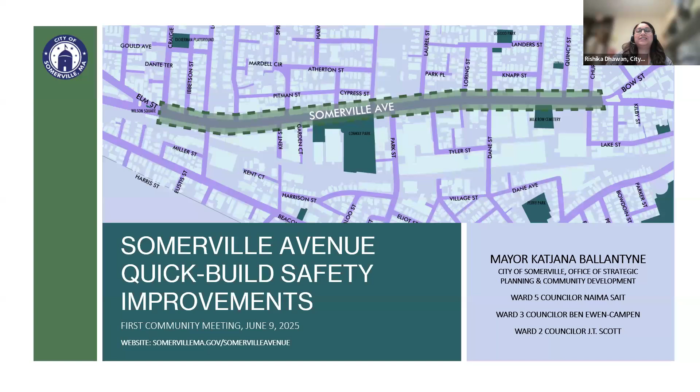Yeah, Viola, sorry, do you want to change the slide? Rishika, are you going to go through the virtual meeting instructions? Yes, sorry, could you change the slide? Oh, of course, yes, that was on me. My apologies. You're fine.

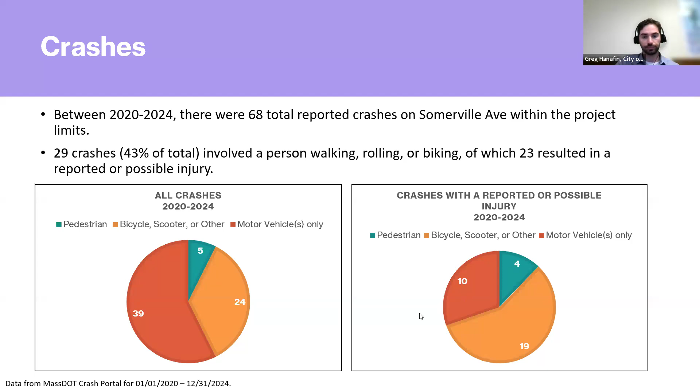Vehicle speeds and volumes are among the indicators of the likelihood of crashes and the chances of a serious injury occurring when a crash does occur. The posted speed limit on Somerville Ave in our project area is 20 miles per hour between Bow Street and Conway Park, which is designated as a safety zone, and 25 miles per hour west of Conway Park. Speed data collected at 2 locations in 2021 and 2022 found that between 31 to 39% of motor vehicles were traveling faster than those posted speed limits.

Vehicle counts collected at the same time found an average of almost 12,000 motor vehicles traveling on this part of Somerville Ave per day on average, which ranks among the highest volume streets in Somerville. We're also going to be collecting additional vehicle speed and volume data at 3 locations along Somerville Ave this spring to bolster this previously collected data.

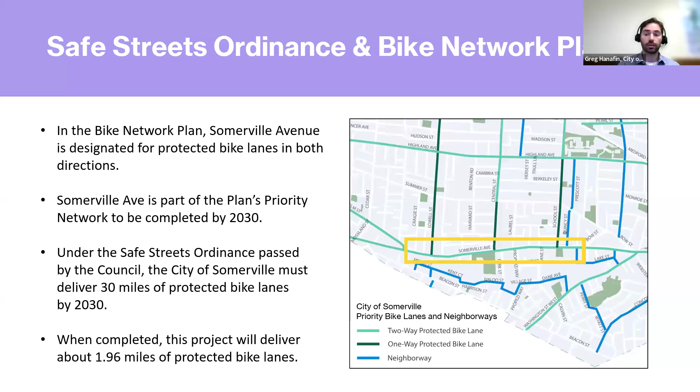Why do we install protected bike lanes as a way to improve safety? Protected bike lanes are a dedicated space for people on bikes that are physically separated from motor vehicles by some kind of barrier. For quick build projects, this protection often includes a striped buffer with a vertical object like a flex post. Parked cars can also sometimes serve as a barrier between people biking and motor vehicle traffic.

Protected bike lanes are an important safety treatment on high volume streets because they increase comfort and access for people of all ages and abilities, reduce crash and injury risk, eliminate the threat of dooring from parked vehicles, reduce potential conflicts between vehicles and people biking, and they're often paired with narrower vehicle travel lanes or visually narrower streets, which encourages slower traffic speeds.

Somerville Ave is centrally located and a convenient route for traveling to nearby commercial districts in Union Square, Porter Square, Davis Square, Harvard Square, and Inman Square. The Kennedy and Argenziano schools are located just outside of the project area, meaning it is the most direct route for many families and children traveling to school by different modes, including walking, biking, and transit. There are 2 bus routes that serve Somerville Ave, which we'll discuss in more detail later in this presentation.

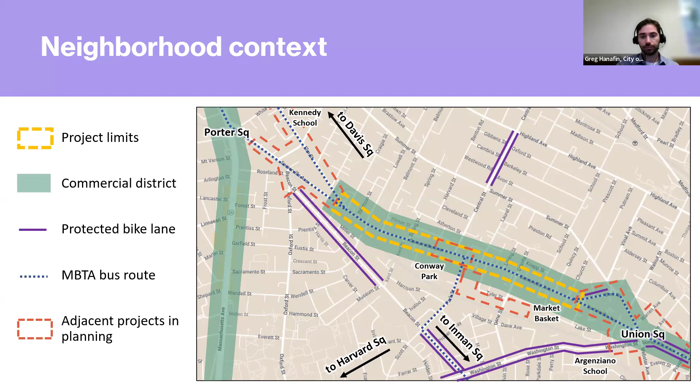A small portion of Somerville Ave near Central Street and Park Street will be reconstructed as part of a different project before our quick build project begins. This project will include floating bus stops, a raised crossing, sidewalk curb extensions, and other traffic calming measures. Design has been completed and construction is expected to begin later this year. The Somerville Ave quick build project we're discussing today will connect with both ends of this project.

The Elm Beacon Connector project is another quick build project that includes Elm Street and Somerville Ave just west of our project limits. This project includes similar elements as ours, such as protected bike lanes and other potential treatments we'll discuss later. The design for that project is currently in progress, which presents a great opportunity for the two projects to coordinate and ensure consistency. Implementation of the Elm Beacon Connector project is expected to begin in 2026.

The Union Square Plaza and Streetscape project will redesign and improve access to the open space in Union Square, including safety improvements to the streets around it. The project will reach the eastern edge of our Somerville Ave quick build project. It's currently in design and planning, presenting another opportunity to coordinate between the two projects. As of now, there is not a construction timeline for this project.

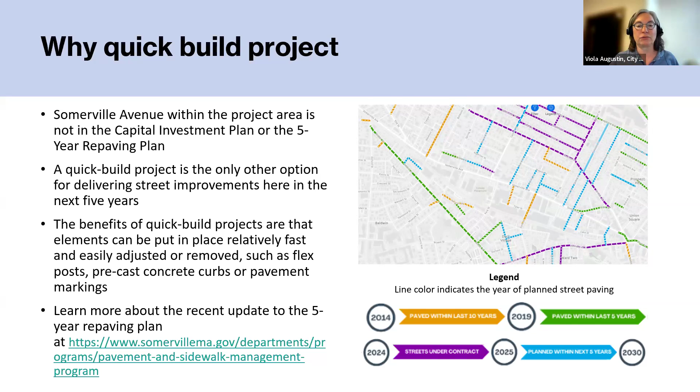If you'd like to understand the process of selecting streets for the 5-year plan and find out which streets are included, you can follow the link on the slide. So an alternative way for us to deliver protected bicycle lanes is through quick build projects. These use pavement marking, signage, and movable elements such as flexible bollards. They allow us to implement the project much faster, though not design it faster than standard construction. It also allows us to be more flexible down the line if additional changes need to be made or if we realize something isn't working—a great way to test something before full construction.

To be clear on what can, cannot, or will not be in this project: it focuses on safety improvements achievable without reconstruction. What will definitely be included is installing protected bicycle lanes using flex posts and removable curbs, pavement striping, and signage. Some parking will be removed, and travel or drive lanes will get slightly narrower. We will make crosswalks safer by designing for improved sightlines. For this category of definitely-included items, we are looking for your input on how to design these changes most effectively.

The next category—what could or might be included—covers changes to parking regulations, bus stop changes, and traffic signal changes. Here we are looking for your feedback on if and where these changes are needed. Finally, it's important to note what is not included: full repaving of the road or repouring of all the sidewalk will not be part of this project. We will also not add speed humps, raised crosswalks, or new crosswalks, and no utility, lighting, or stormwater work will be done as part of this project.

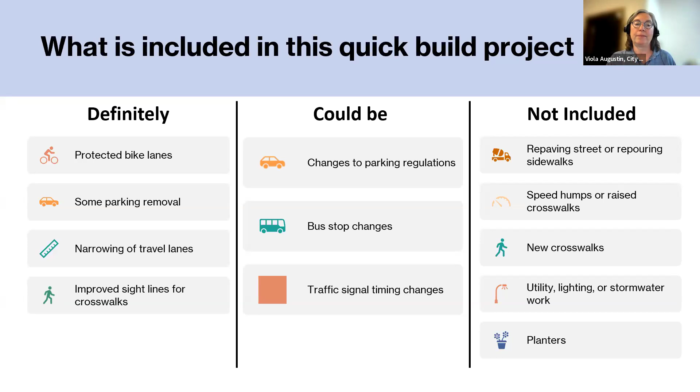And we will also not add sidewalk elements such as planters or benches. This does not mean you cannot let us know where any of these changes are needed, and we will record your comments, but we will not be able to incorporate them in this category for this quick build project.

The timeline for this project: we are at the very beginning, with this being the first public meeting. We have not started design beyond some test fitting of elements. After this meeting, we will use the summer to collect feedback from both the public and city departments, and incorporate that information gathered in summer 2025 for initial design development this fall and winter.

Then when the weather is good enough to be out on the street again in spring 2026, we will present the initial design and again ask for your feedback. In summer and beginning of fall 2026, we will finalize the design. At the end of 2026, we will share the final design and secure a contractor so that implementation can happen in 2027.

And at this point, I think Rishika will do another poll.

Before we jump into the next section explaining more about the existing conditions and potential improvements, we want to ask how you use Somerville Ave, specifically between Elm Street and Bow Street. I'm going to start the poll, give it a few seconds to answer.

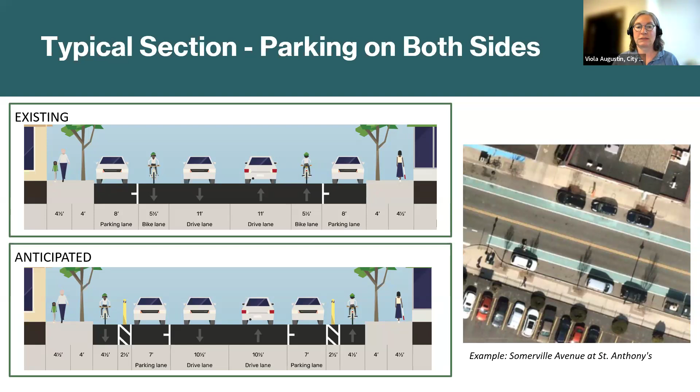And these dimensions are a continuation from the Elm Street, Elm and Beacon Connector, Somerville Avenue cross-section.

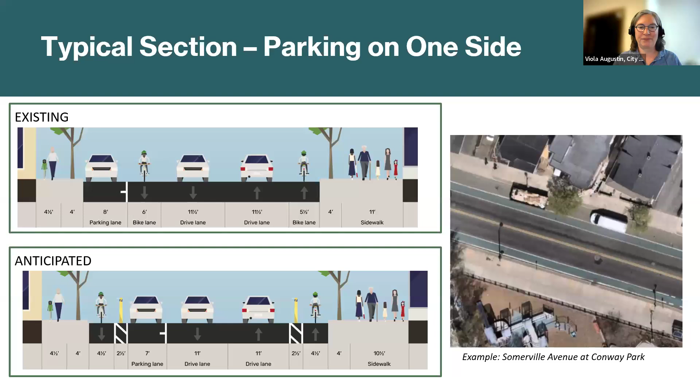In this scenario, there are some sections of Somerville Ave that have no parking on either side without a crosswalk, and we would basically add flex posts to the buffers in those sections.

You can see we can arrange the 7 foot bike lane with buffer next to the 7 foot parking. We have 10.5 foot lanes, and then again the same thing on the other side, 7 feet parking and 7-foot bike lane with buffer.

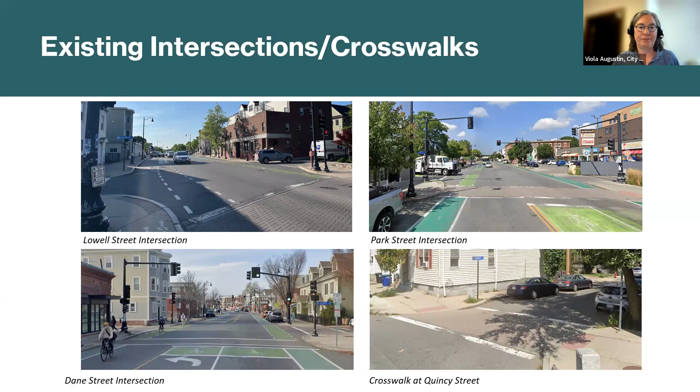So what can we do in a quick build project to improve intersections? We can make signal changes, mostly timing changes, so we can add more green time if needed. We can also change the sequence of phasing and what mode goes in every phase—that's generally an easy fix. We might be able to make some equipment upgrades, but no major upgrades are anticipated right now, so there's some limitation to what we can do with signal changes.

We can also evaluate if all the existing signals along the project area are necessary. In particular, we looked at the signals right at Loring Street and at Beach Street, and again we're looking for your feedback. Do you feel like these pedestrian signals are necessary?

The other improvements we've talked about already are the clear corners. These images very clearly show that if cars are parked too close to a crosswalk, especially kids that are not that tall cannot be seen. By making sure that parking cannot go that close, we can hugely improve the safety of a crosswalk. We have data from Hoboken, New Jersey, where they've rolled out these clear corners citywide, and they had no reported traffic fatalities in over 6 years. So we feel this is a very low-hanging fruit to hugely improve safety.

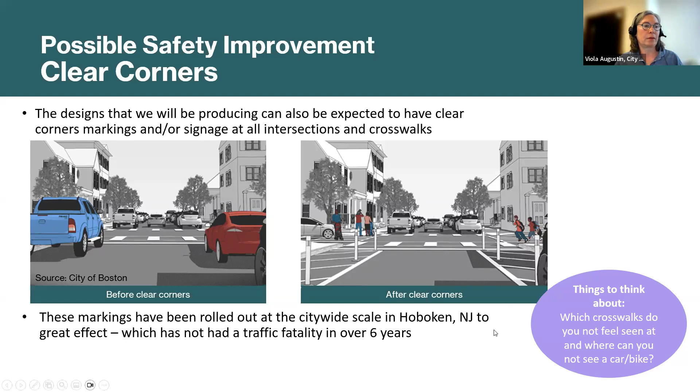The last fairly easy safety improvement is what we call centerline hardening. We deploy flex posts in the center, and that deters people from turning into side streets too fast—they have to really go around this flex post. It also indicates the presence of a crosswalk, so it's another visual cue for a driver to slow down.

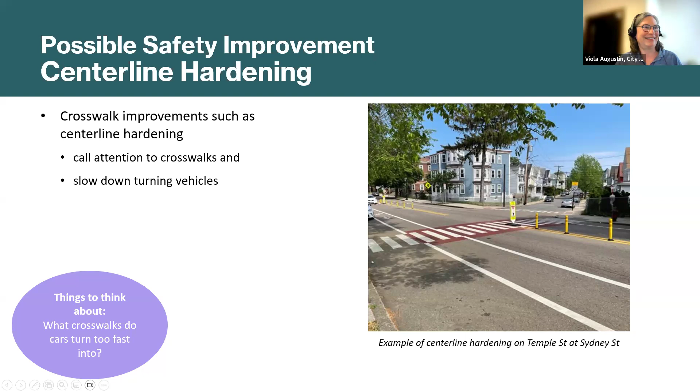This one is specifically following more of what Viola mentioned and talked about at the intersections. We want to know more about where you feel most unsafe on Somerville Avenue.

Okay, at the moment we're getting most votes for Park Street and Central Street, with a few for Elm Street and Craigie Street, about 13%. Give it a few more seconds. Okay, looks like most people, about 59% of responses, are Park Street and Central Street. And end the poll, thank you.

All right, next I'll talk about bus service within our project limits. Bus service operates all along the segment of Somerville Ave within our project limit. This slide shows images of two existing bus stops, one by St. Anthony's Church and one by Market Basket. Currently, all the bus stops in the project generally look similar to these, with the bus pulling out of the travel lane across the bike lane to reach the stop.

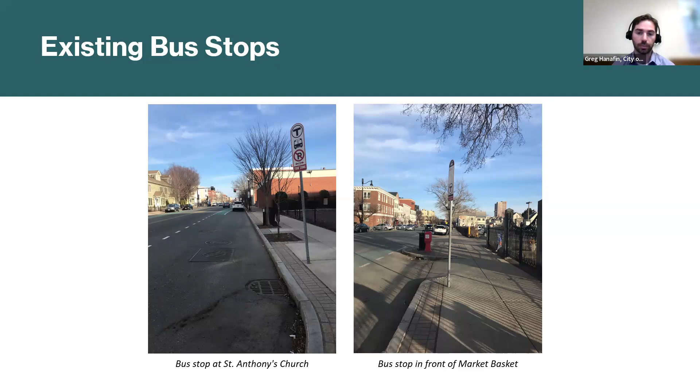Later this year, as part of a different project, construction will begin on two floating bus stops near Central Street and Conway Park.

The map on this slide shows the existing bus routes that serve the project area and the locations of all the existing bus stops. The Route 83 services the project area west of Park Street, and the Route 87 services the entire project area. As part of the MBTA's bus network redesign effort, a future high-frequency bus route, the Route 96, will also serve the entire project area. However, a date has not yet been set for this route to launch.

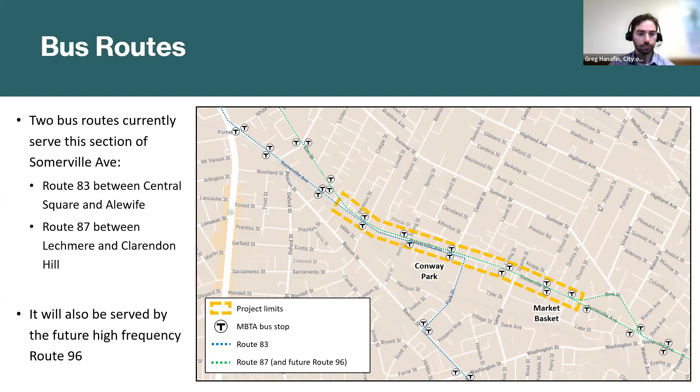One of the bus service improvements we can consider as part of this project is bus stop consolidation. Stop consolidation looks at where the number of bus stops along a street can be reduced to find the best balance between convenient access and bus operations, which can help reduce bus delays for riders by reducing the number of times the bus stops.

The MBTA's recommended bus stop spacing is between 1,000 and about 1,300 feet. All of the existing stops within the project limits are closer than that recommended spacing currently, and the map on this slide highlights one extreme instance where two stops are about 400 feet apart. However, the recommended stop spacing isn't a hard and fast rule, and proximity to key destinations is an important piece of locating bus stops. For example, we know that Conway Park and Market Basket are both destinations where we need to maintain bus stops, even if they end up being closer than that recommended minimum spacing.

So we're very interested in hearing from community members about where you'd like to see bus stops, as part of our evaluation of possible consolidation opportunities. This map also highlights the Elm Beacon Connector project, which is conducting a similar evaluation of bus stop locations, and we'll make sure the two projects are coordinated on any bus stop changes being considered.

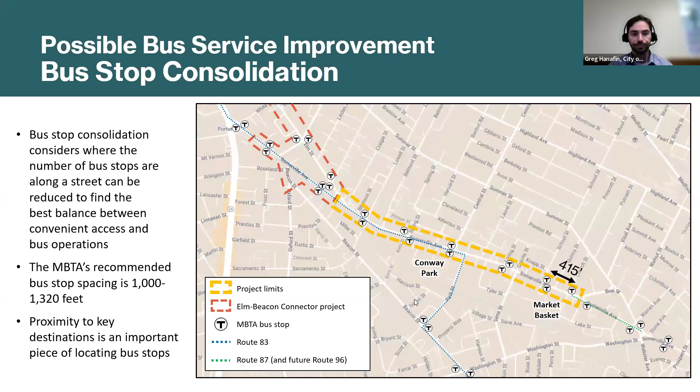Apart from consolidation, as part of this project we can explore where it may be possible to relocate bus stops to create a safer and more comfortable experience for riders. This particularly applies to bus stop accessibility. We know there are cases along Somerville Ave where buses currently don't have enough space to pull parallel to the curb, meaning the bus can't properly deploy its wheelchair ramp, and riders may need to step into the street to get onto the bus.

For example, the bus stop in front of Market Basket heading toward Union Square is currently about 53 feet long, but would need to be a minimum of 100 feet long to meet the MBTA's definition of an accessible stop. We can't widen the existing stop because of the bump outs on both sides, but we can consider if there's an alternative location for this stop near Market Basket that improves rider safety and accessibility.

Generally, for a curbside bus stop like these, the city prefers to have bus stops after intersections and crosswalks, which we call a far side stop, and there are a few reasons for this preference. One, it tends to be safer, since buses don't block crosswalk visibility of oncoming traffic while they're in the stop. Two, it helps reduce delay because buses don't get blocked in by vehicles stopped at traffic signals. And three, it allows shorter bus stops, since the bus has more space in front of the stop to pull into it, whether that's an intersection or a driveway.

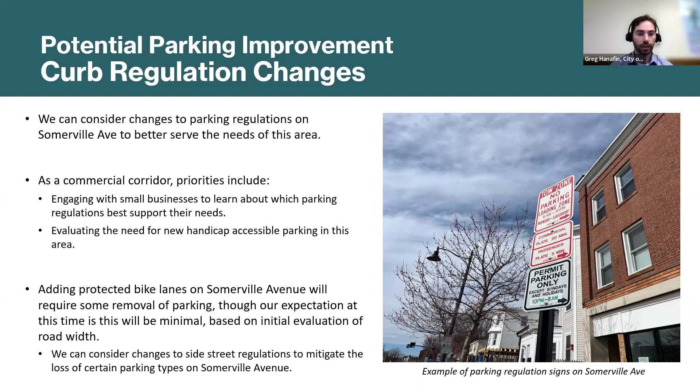So I mentioned we're currently expecting parking removal to be minimal, even with the installation of the protected bike lanes. This is because along much of the street today, the travel lanes and parking lanes are wider than our standard widths for this type of street. By reducing those widths to our standards as part of the quick build project, we anticipate being able to keep most of the parking that exists today.

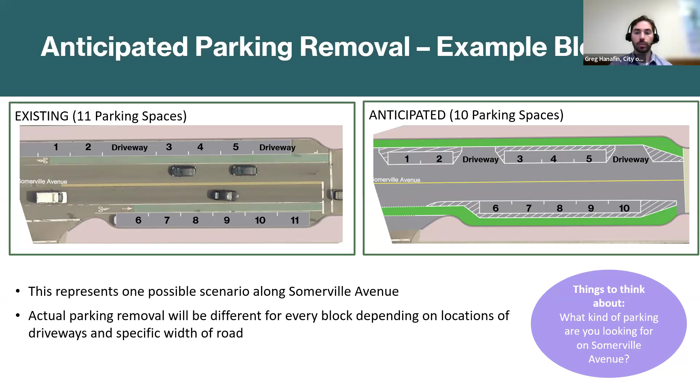Once we have a complete concept design, we will seek community feedback on the changes that are proposed.

Sidewalk and street maintenance: the condition of the sidewalks and street vary along the corridor, and there are places where accessibility challenges exist today due to damage, as well as street furnishings in need of restoration. While street and sidewalk reconstruction are not included within the scope of this quick build project, we do have the opportunity to highlight problem areas and work across city departments to conduct repairs as part of our regular maintenance.

So we invite community feedback on street and sidewalk repair issues, and we will work to incorporate these into the project to the extent possible. You can also submit repair issues to 311 or share them with us by email at any time, and they may be addressed on a sooner timeline than this project.

I'm going to talk a little bit more about what's happening next and the ways that you can engage.

We have broken down how community feedback will shape the design in each phase of the project. During our pre-concept design phase, which is happening now, we are looking to you to provide insight into transportation safety concerns in the area, including identifying critical crosswalks to prioritize, sharing bus rider experiences and other critical transit service concerns, and sharing your experience traveling through intersections in the project area. During the concept design phase, we would look to you to ask questions about the details of the design.

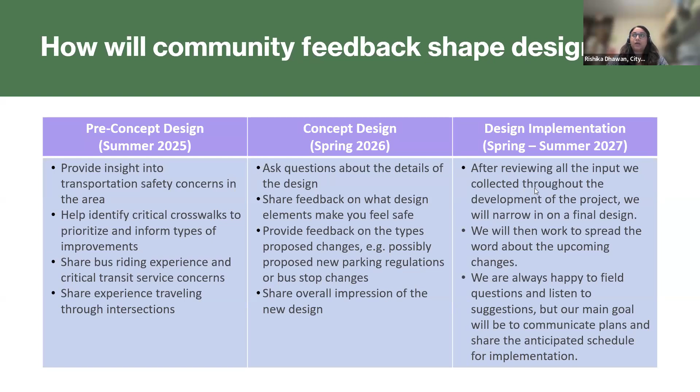As you know, we started this evening with our virtual community meeting to introduce the project. Tomorrow, we'll be releasing a survey and a public input map where you can detail more of your feedback. At this stage, we aim to hear more about your transportation safety concerns and priorities on Somerville Avenue.

We aim to meet people where they are at different high pedestrian traffic locations, so we will be doing street outreach pop-ups, and I'll talk more about that after this slide. Along with that, we'll also be connecting with businesses one-on-one through business block walking. We're also committed to keep you all updated.

So whether that's direct emails, printed flyers, through social media posts, you can sign up for the mobility newsletter on our website where we share updates there as well. And we will also be connecting with our transportation specific advisory committees to hear their questions and their feedback as well.

So more specifically, we will be posting updates on the webpage for the surveys and the public input map that we're hoping to keep open till July 7th. Along with that, you'll also see more information for the mobility newsletter. And as I mentioned, we'll be doing some street outreach pop-ups.

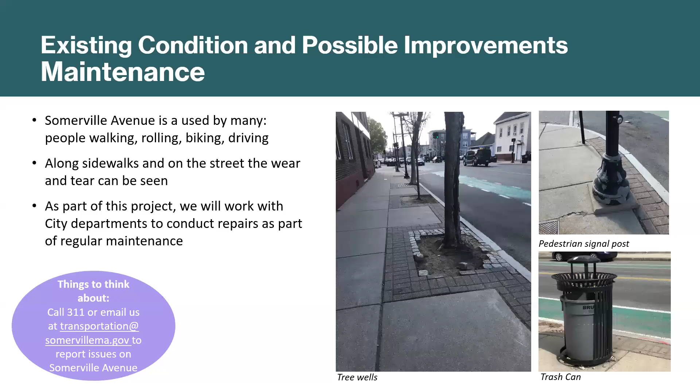We were shown the picture of the bus stop at Market Basket. There's another issue in the same area, which is that when you're exiting Market Basket, about 200 feet down the road, you have extremely poor visibility to the left due to the parked cars. So I would suggest moving this bus stop about 200 feet forward to take the last 4 or so parking spaces over there. And then this current curb bump out here could become parking.

That would make a proper bus stop and also much safer to exit Market Basket. I also have a more general question, which is if you have considered putting a bidirectional bike lane specifically on the north side here. The bike paths that are proposed will have the same issue that a lot of other bike paths have, which is that they're way too narrow. It's impossible to pass somebody. And so there will be people darting in and out of the bike path to try to overtake each other. And it's also, of course, impossible for parents to ride next to their child.

In this case, the corridor is so wide that if you can put a proper 10-foot bidirectional bike path on the north side, that would also give you enough buffer that you can have proper pedestrian islands at all of the crosswalks. So you only have to cross the traffic and then the bike path separately instead of everything all at once. So I really think this is something that should be considered here. This is a long segment where I think this can be implemented and be very successful.

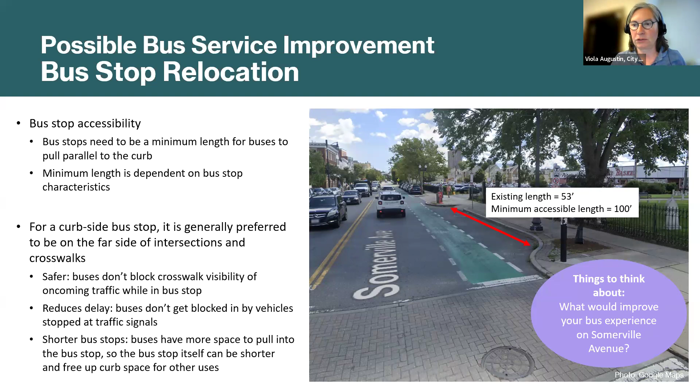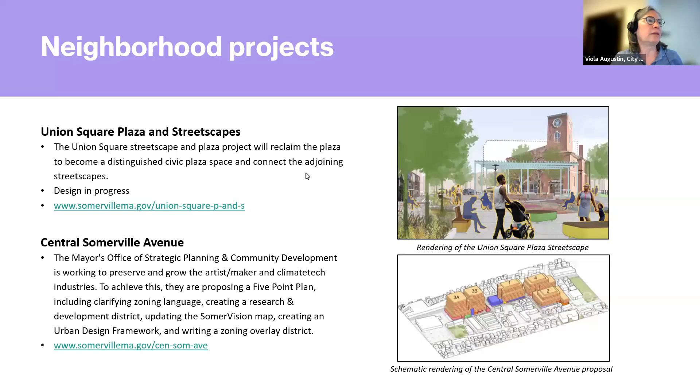So John, the Central Street intersection is actually being redone as part of another project, and that is a fully designed project. I'm trying to find the little plan we had put up — I don't know how much we can see — but yes, that will be improved hugely.

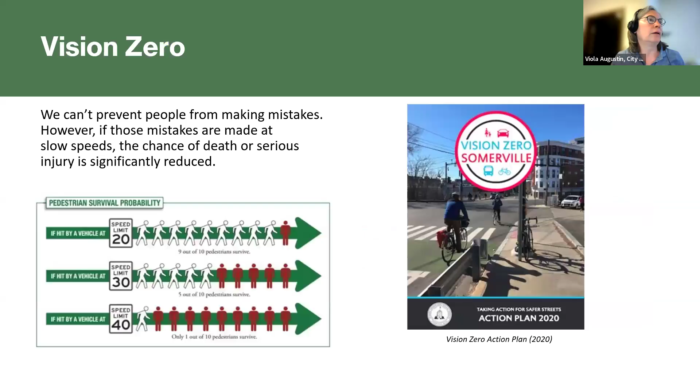No, I'm sure I missed it. No worries. We only mentioned it sort of in passing — there's a web page for that where you can look at the plan. Wonderful, I'll dig that out. My apologies, I can't find it that fast. No, I'm sure I'll be able to find it.

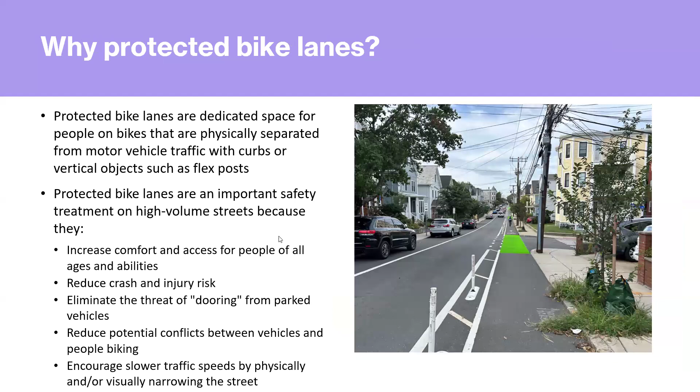Thank you so much — I think that will actually help a lot, because personally, going through that red light going straight at the right time after stopping ensures I'm not in conflict with cars. So, this is the little plan, and this is actually the Dunkin' Donuts, this is Central Street.

So you will actually have the floating bus island, as we said. You will have bicycle lanes at the level of the sidewalk, I believe. If not, they will be protected behind the floating bus island.

We were not able to do anything directly on the intersection, so the turning right conflict is unfortunately still there even after this project. But some of the conflicts on the north side here with Dunkin' Donuts should be helped.

Can you see my cursor, John? Can you see the cursor? Or am I just pointing? No, I cannot, sorry.

So the north side there, the corner at Central and Dunkin', you see that new curb extension. That should also slow down cars turning right, since it's a very shallow turn and people just take it without thinking.

Great, thank you very much. You're welcome.

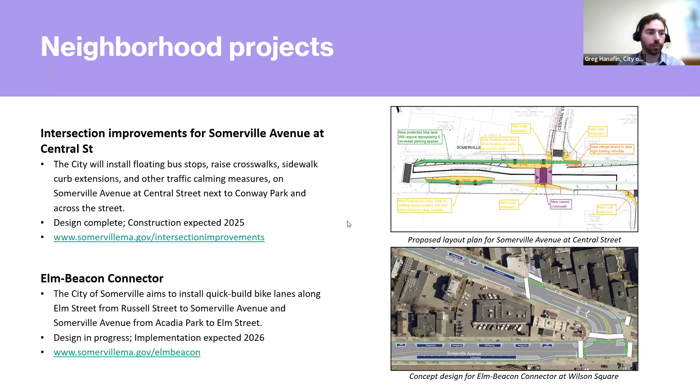Just one comment too, we've had a few comments or questions about the Market Basket driveway and challenges with visibility at the driveway exit. I believe some of that issue will be addressed through the clear corner markings that Viola described. In addition to crosswalks, we also apply those to intersections and high volume driveways, which Market Basket would fall into. So regardless of the bus stop location, we would likely pull back parking from the Market Basket exit to improve visibility of vehicles exiting.

That's great, thank you. We have two more people in the queue. Thomas.

Hello, thank you for this presentation. Very interesting, a lot of information here. I have a couple of questions, more business related.

I'm part of the Chamber of Commerce, and I know you're going to do outreach to businesses, and it sounds like you're going to just walk in. One of the problems with that is the people who run or own the businesses aren't always there. So I think there needs to be a better coordinated outreach to the business community along Somerville Ave. This is a major business sector with a lot of small businesses. I know we have the large ones like Market Basket, but there's a lot of small mom and pops already feeling affected by the loss of parking from the original Somerville Ave project.